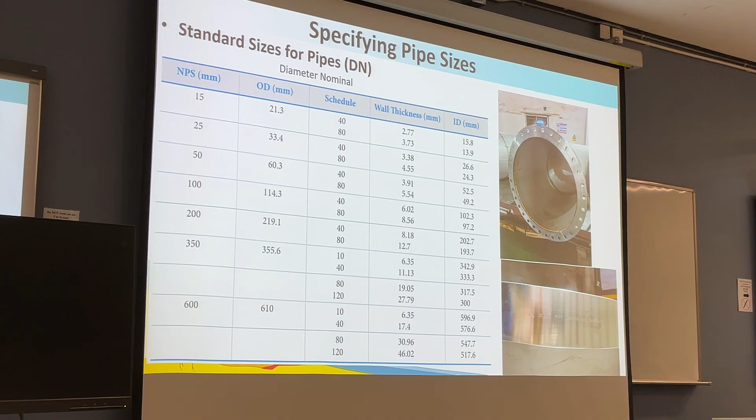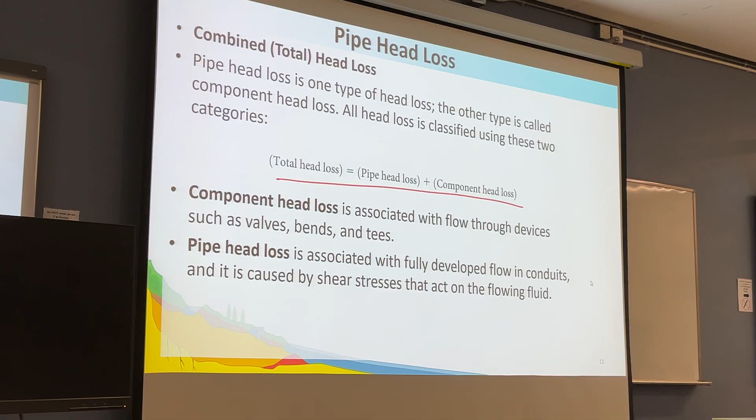你需要去揾啲 commercialize 嘅 pipe。Total head loss 就等於 pipe head loss 加 component head loss，沿住水流嘅管線方向，head loss 係由兩部分組成嘅：pipe 嘅 frictional loss 同埋 component loss。最重要嘅一條 equation 就係 Darcy-Weisbach equation，通過呢條 equation 我哋去計算 frictional head loss。

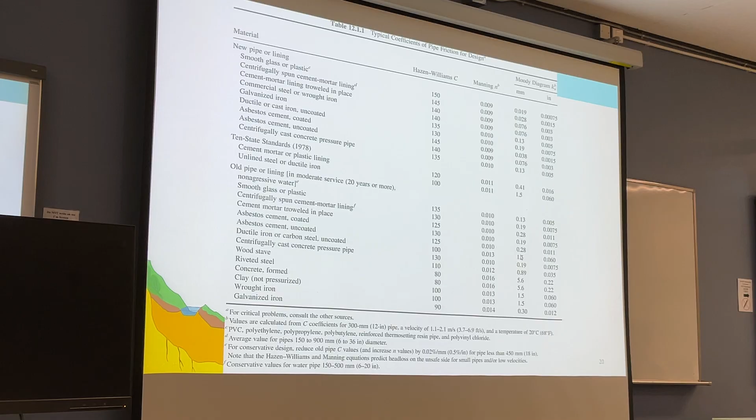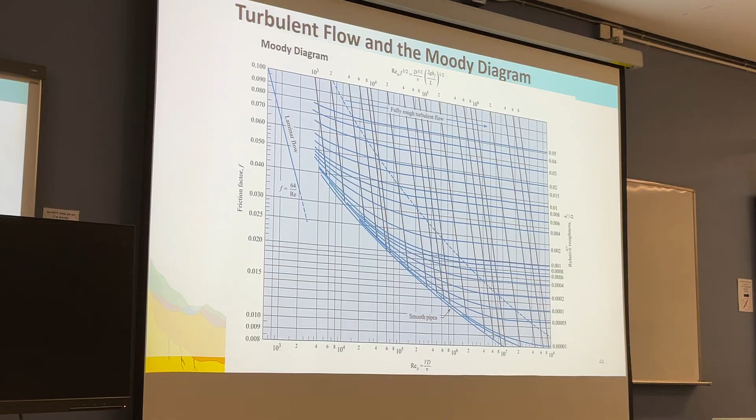我哋要知道嘅參數包括 frictional factor、L 就係 length、D 就係 diameter、V 就係水流速度。Frictional factor 需要查表，或者睇 Moody diagram，你亦都可以用 equation 計出嚟，例如 Hazen-Williams equation 同埋 Manning equation。但喺 pipe flow 我哋主要都係用 Darcy-Weisbach equation 為主。

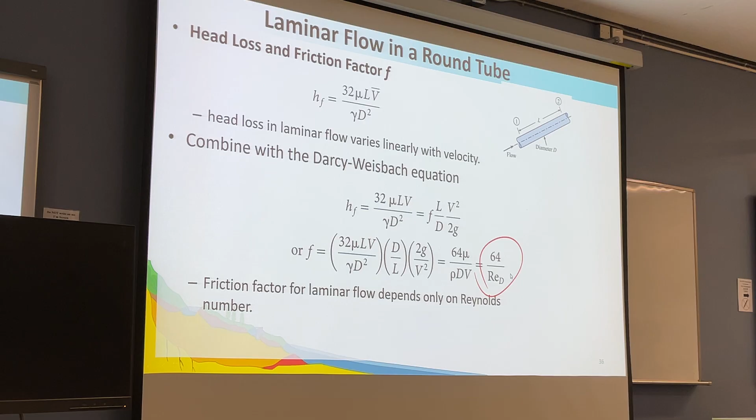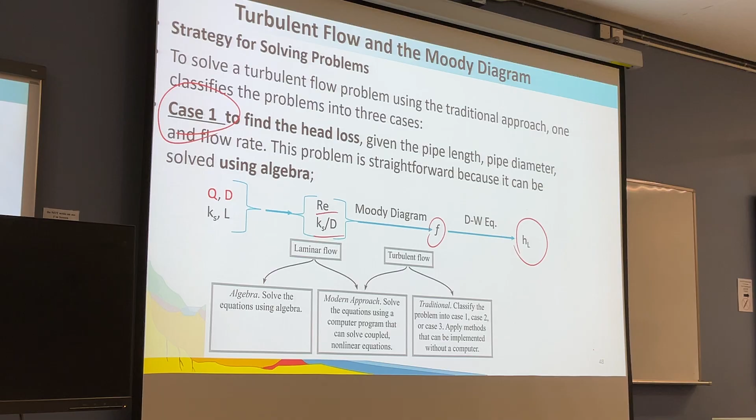Case 1 就比較 straightforward，係計 head loss。知道個 discharge、diameter、material、長度，分別揾 Reynolds number 同埋 relative roughness，跟住查表或者計算揾 F，再入翻 Darcy-Weisbach equation 就計到 head loss，呢個係 straightforward 嘅。

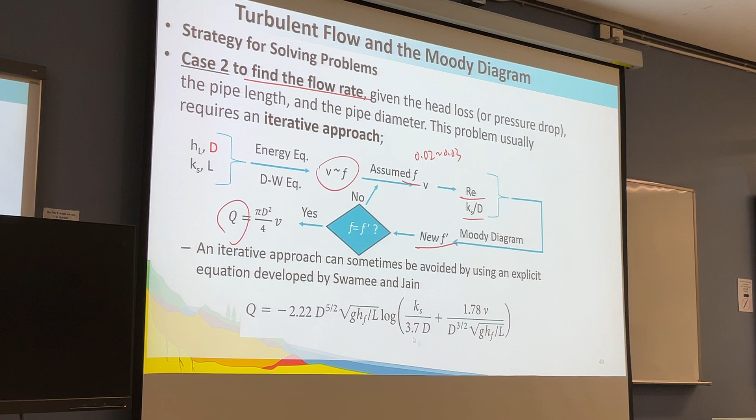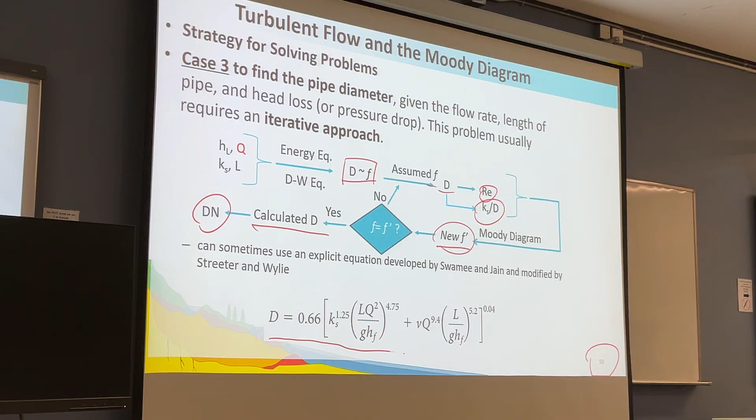第3類 problem 就係揾 diameter。首先通過已知嘅 head loss、discharge、material 同埋 length，develop 個 D 同埋 F 嘅 relationship，assume 個 F 去計個 D，計完之後個 D 會影響到 Reynolds number 同埋 relative roughness 嘅計數，跟住呢兩個參數夾埋揾到個新嘅 frictional factor，check 下個 assumption 同埋個 calculation 係咪一致，唔一致就再代入去計多一次。

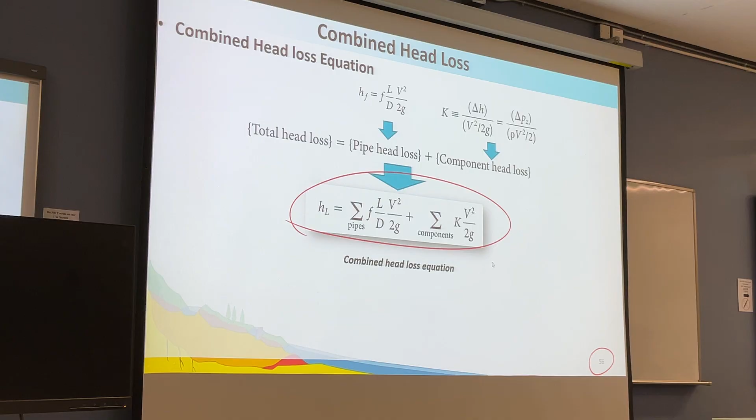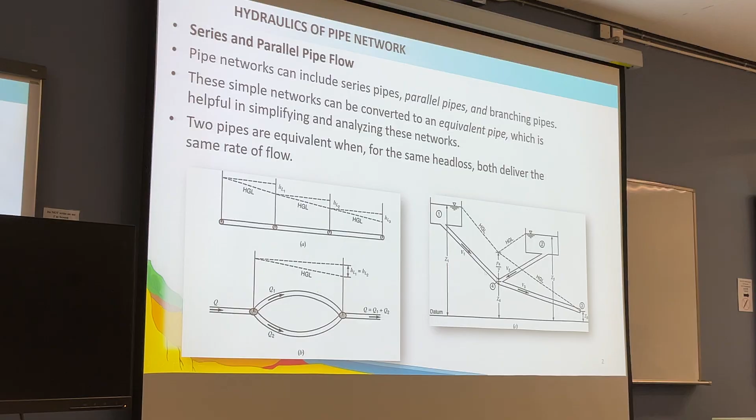跟住 pipe system 測驗嘅話主要係兩大類：一個係 parallel 嘅 pipe system，另外一個就係 branching pipe system。Parallel 嘅 pipe system 都係 follow 兩個原則：junction 同埋 junction 之間嘅 head loss 係得一個數值，即係 head loss in pipe 1 等於 head loss in pipe 2。

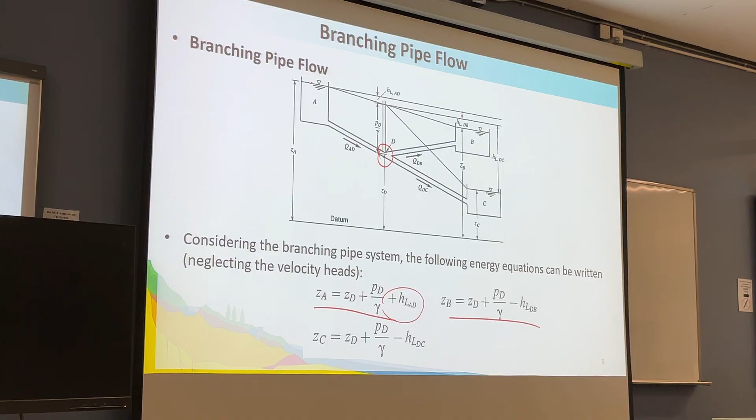跟住即係個 component head loss equation，K 乘翻 velocity head 就計翻個 component head loss。頭先有啲應該要講嘅嘢漏咗少少，topic one 嗰度仲有一樣嘢要講，其實係 pump power 嘅計數，呢條 equation 都要知道、要記。係 gamma Q H，gamma 即係 rho g，即係9810，如果係水嘅話，Q 就係你個 discharge，H 就係你個 pump head 或者係 turbine head，呢條 equation 就係計算你個 device 嘅 power。

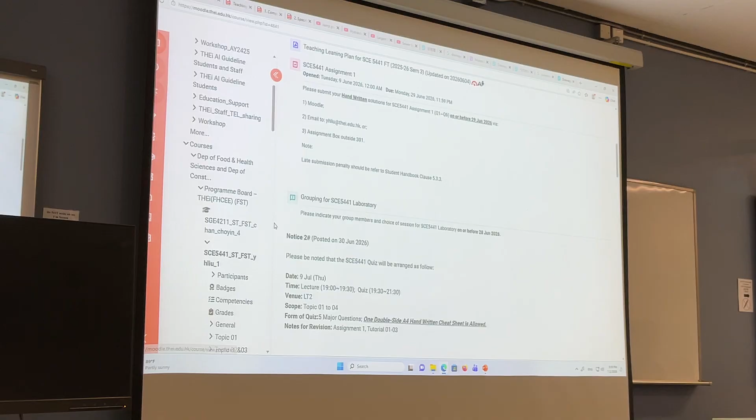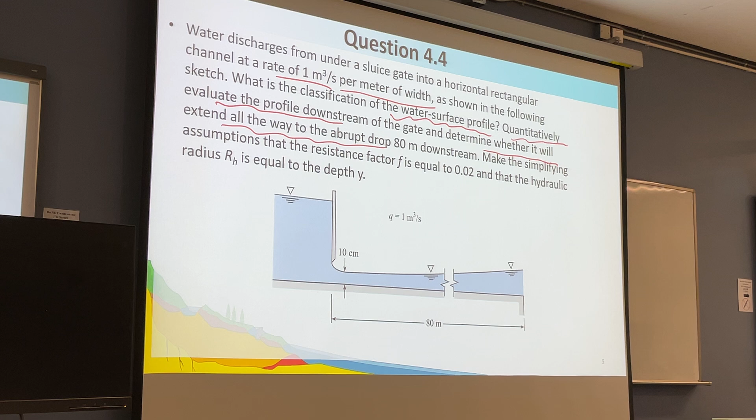This is the tutorial for question 4, okay? This is a question talking about quantitatively estimating the water surface development. Water is discharged from under a sluice gate into a horizontal rectangular channel at a rate of 1 meter cube per second per meter width of the channel, as shown in this figure. What is the classification of the water surface profile? We are asked to determine this, quantitatively evaluate the profile downstream of the gate, and determine whether it will extend all the way to the abrupt drop 80 meters downstream. Make the simplifying assumption that the friction factor is 0.02, and that the hydraulic radius is equal to the water depth.

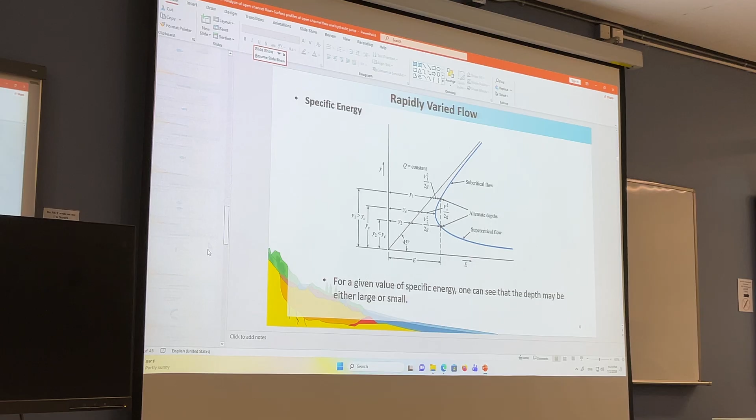Now this is the question description. We are asked to determine the water surface profile and quantitatively work out the water surface. Now, so we need to use the equations for water surface calculation. Delta X is equal to... we will use this equation.

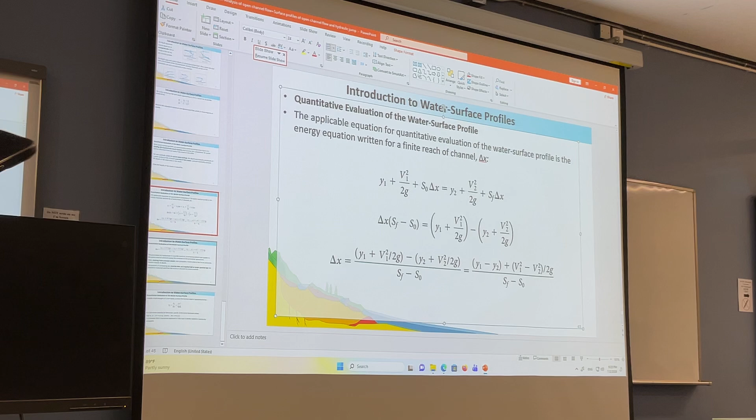We'll use this equation to do the calculation: Y1 subtract Y2, plus V1 squared subtract V2 squared over 2G, divided by SF subtract S naught. And SF is calculated by this equation, FV squared over 8G RH.

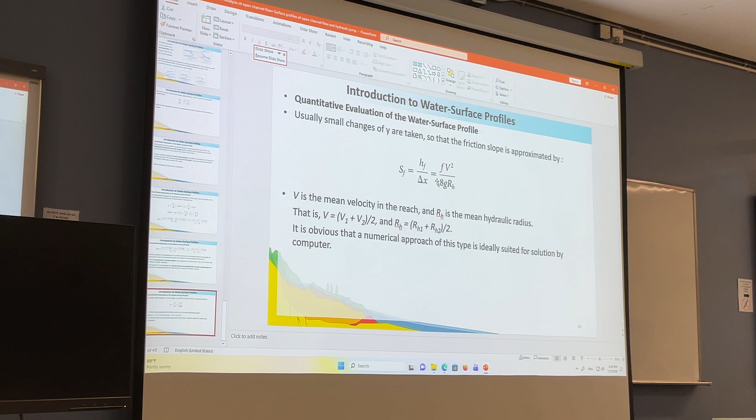Y1 subtract Y2, plus V1 squared subtract V2 squared over 2G, over SF subtract S naught. And the SF is calculated by FV squared over 8G RH.

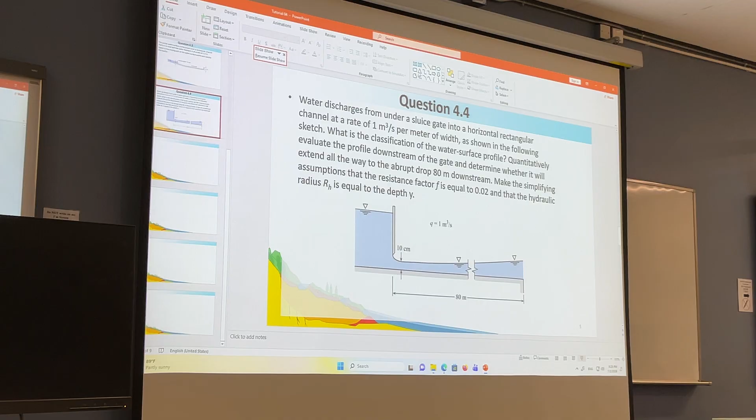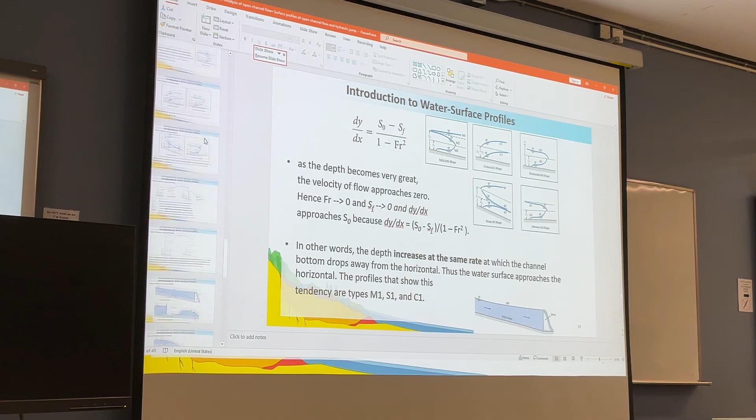Now we are going to answer the first question: what's the water surface profile of this one? This is a horizontal channel, so the profile must be H something, okay? The horizontal slope, H something. Now, H profile has two sub-classifications, which are H2 and H3. Horizontal channel has H2 or H3, depending on whether it's larger than the YC.

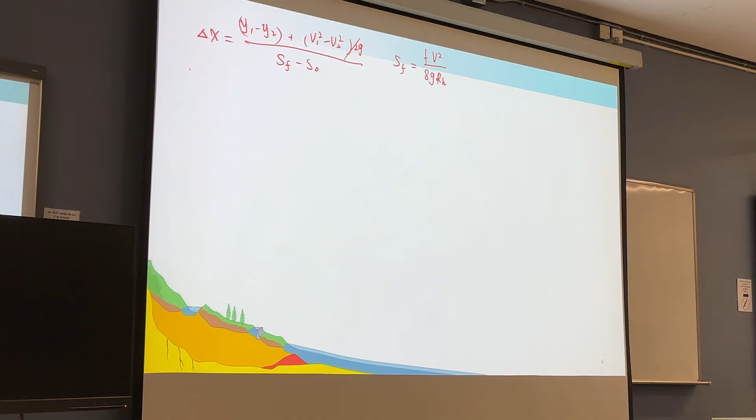Now, because the YC can be determined by Q squared over G, YC equals Q squared over G to the 1/3 power. The unit discharge here is 1 meter squared per second, 9.81 for G, and 1/3. This YC is found to be 0.467 meter. So the water coming from the sluice gate is 10 cm.

Because the opening of the sluice gate is 10 cm, the actual depth is smaller than YC, so it is H3 profile here. The water flow immediately from the gate is supposed to be the H3 profile because the water depth will be smaller than YC. So H3 profile will have the chance to generate a hydraulic jump.

So we are going to quantitatively evaluate the profile development using this equation. Now we will use a spreadsheet to do this calculation. We will showcase some of the typical steps for the calculation.

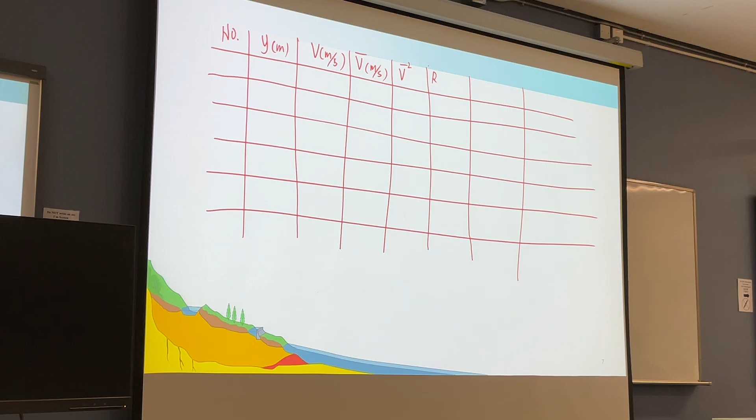Calculated by the depth, mean velocity v bar, also in meters per second, the v bar squared, okay, and the hydraulic radius, mean hydraulic radius, or we say Rm, mean hydraulic radius, in meters, and the friction slope Sf, friction slope, okay, no unit, and the delta X, and then distance from the gate, the actual X, the actual location.

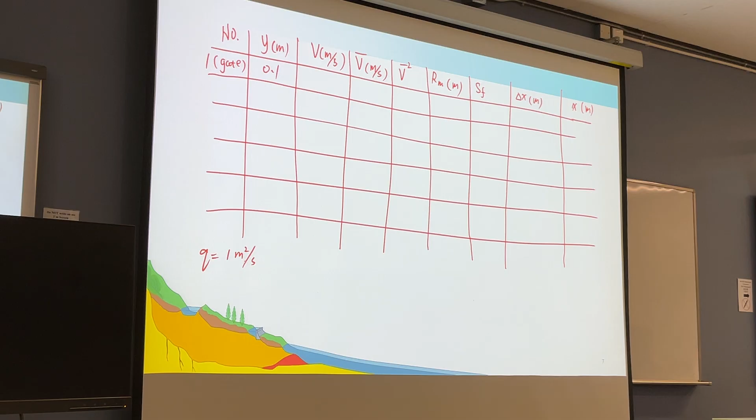Now, the first location is at the gate, okay? Just at the gate. The water depth here is 0.1 meter, 10 cm, okay? This is a known location. Now, because Q is equal to 1 meter squared per second, for example, V1 is equal to Q, the small q, over the water depth. Y1 is equal to 1 meter squared per second over 0.1, so it is equal to 10 meters per second. So we write 10 meters per second here. V squared is 100, okay? Now this is point 1.

The point 1 starts from the gate. Okay, we may draw a diagram. X is the distance away from the gate, and Y is the water depth. The point 0, okay, 0 meter. This is 20 meters, 40 meters, and maybe 60 meters, 80 meters, right?

Now, water depth may be like this: 0.1, 0.2, 0.3, 0.4, 0.6, 0.7, 0.8. Now, the very first point is here. The point 1 is located here at the gate. Now next we assume location 2, where the water surface, the water depth, is assumed.

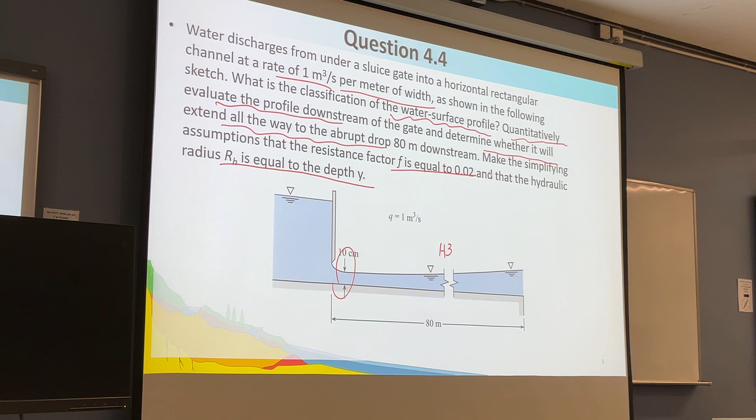Friction slope, we use this equation for the calculation. SF is equal to 0.02. The question gives us a consistent frictional factor of 0.02, times V square. V square uses the mean V square, which is 73.4 over 8 times G times the mean water depth, mean radius, 0.12. And this one is calculated to be about 0.156.

So for delta x, we use this equation: Y1 subtract Y2. Delta x between point 1 and 2 is equal to Y1 subtract Y2, 0.1 subtract 0.14, plus V1 square, which is 100, subtract V2 square, which is 51.0, over 2G, divided by SF. The SF here is 0.156. The bed slope is 0 because it's horizontal. The delta x between 1 and 2 is calculated to be 15.7.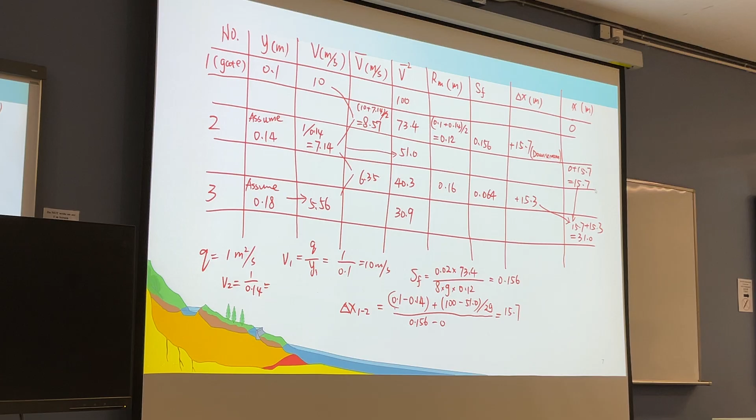So for the first several points, point 2 is at the x location of 15.7. Now we plot here: 15.7, this is 10, this is 15, is about here. We assume the depth is 0.14, so point 2 is about here at the 15.7 x-axis, with water depth 0.14. Point 1 here is 0 and 0.1. This is point 2. Point 3 is at 31 meters, with water depth about 0.18. So this is point 3: 31.0 and 0.18 water depth.

Now, this is not yet up to 80 meters, so we need to continuously calculate up to 80 meters or longer. To save time, we'll directly show you the result. If we continuously assume the water depth increases in a 0.04 meter manner, next will be 0.22, 0.26, 0.30, and 0.34. Then we calculate correspondingly the V, mean velocity squared, calculate SF, then delta X, and the location will increase like this.